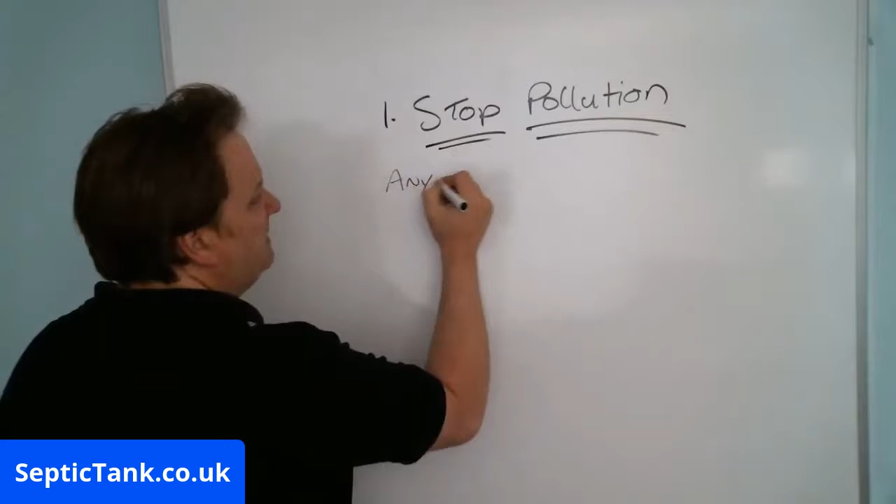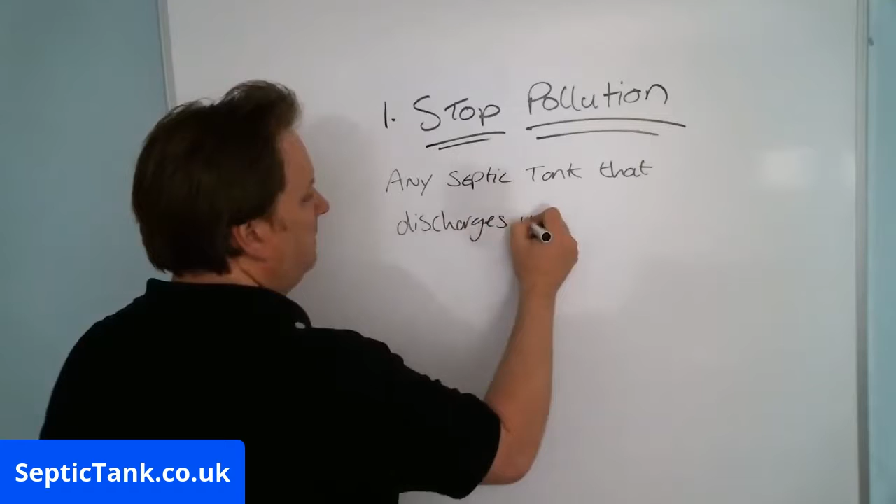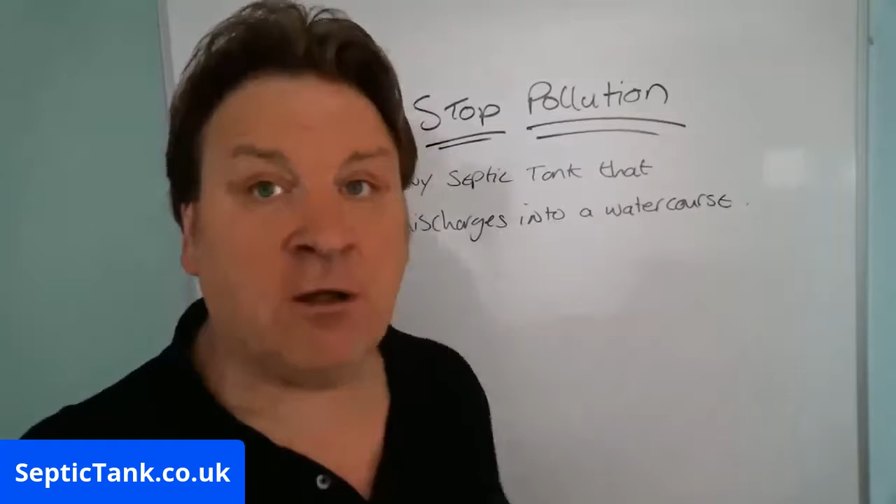Any septic tank that discharges into a watercourse. So after the 1st of January, any septic tank that discharges into a watercourse, by watercourse I mean a river, a stream, a ditch, a culvert, anything like that, a brook, will become illegal, right?

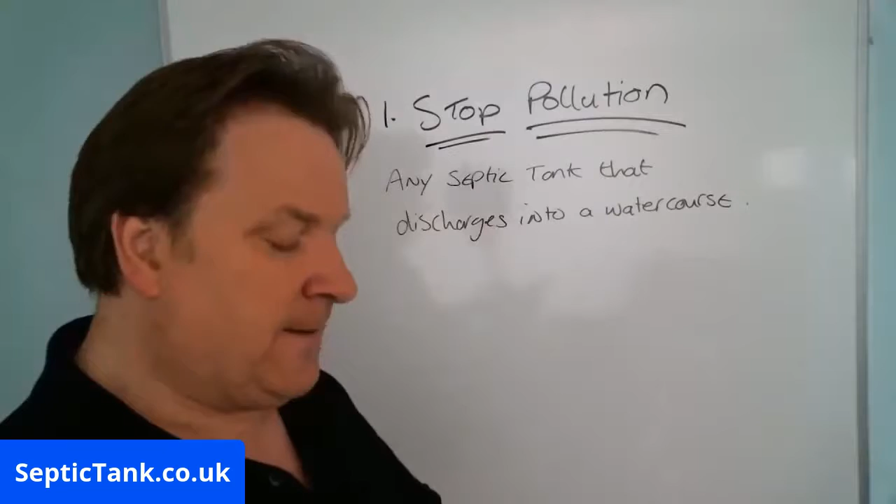Because raw sewage goes into a septic tank. Raw sewage comes out of a septic tank, in this instance, directly into a watercourse. So any septic tank that is discharging into a watercourse after the 1st of January 2020 will become illegal. That's a fact, right? You only have to go on to the .gov website and type in General Binding Rules and you see it.

Now, I'm not saying you're gonna like what I'm telling you here, but nevertheless, it's coming. As I said, the whole reason I'm telling you that is because I've got some really good news that can help you easily, simply and cheaply fix your septic tank and make it legal. That's the whole point of this live broadcast. I'm not trying to sell you anything. I don't want your money. So if you've just joined me, let me put your mind at rest. I'm just giving you the facts, right? So these are the facts.

Okay. So 1st of January, if your septic tank discharges directly into a watercourse, it will become illegal. Full stop. No ifs, no buts. That's number one. Okay. That's the most important. That's one of the biggest.

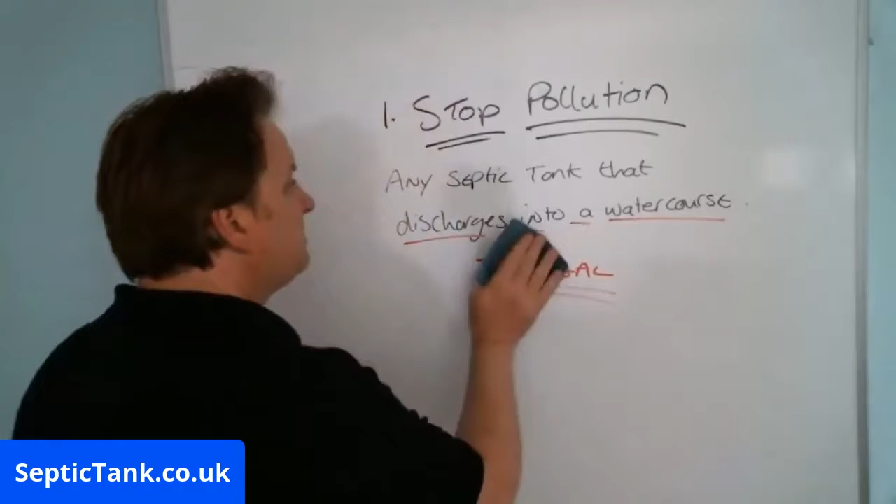Oh, and why they're calling it the septic tank ban is because when the government agencies go around to your house or my house, and if they find that our septic tank is discharging into a watercourse, then they'll ban you from using your septic tank. That's why it's called the septic tank ban. Okay. All right. So that's number one. They want to stop pollution.

All right. Number two, obviously, they want to stop pollution, but the second reason is also to stop pollution. But under this one, there's like different requirements, okay, which will make your septic tank or my septic tank illegal. Okay, so again, just go on to .gov, general binding rules, and you can see this for yourself, right?

So if any septic tank is leaking, that means if it's got any cracks in it, if the mortar and the cement have crumbled and sewage effluent is seeping out, is leaking out, that's what they mean by that. If it's leaking, if the soakaway is blocked, or if it's not draining away,

or if there's water bubbling up, or pools or puddles of water above the septic tank or the soakaway. So what that means is, it can be puddles. So if there's puddles of water, wet grass, because at the end of the day, the water is sewage, raw sewage. It's sewage effluent.

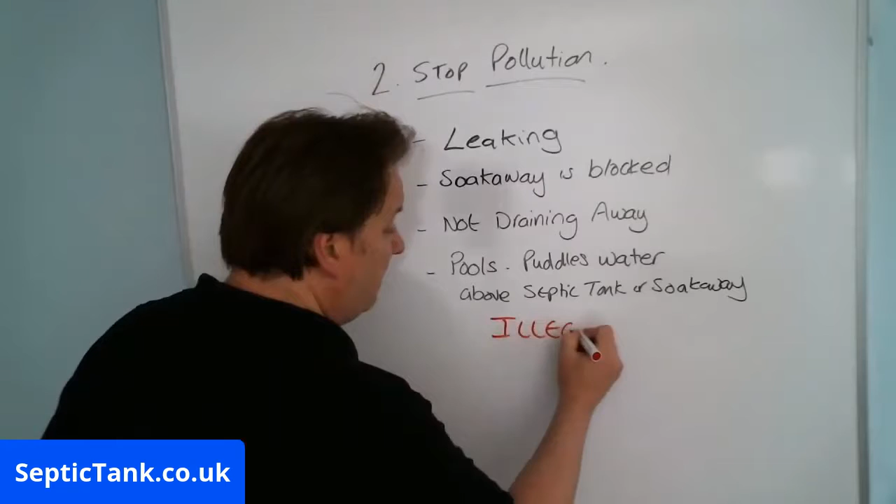You call it wastewater, but if it's leaking, if your soakaway is blocked, if it's not draining away properly, if there's pools or puddles of water above where the septic tank or the soakaway is, especially on the grass or the drive, then after the 1st of January, your septic tank will become illegal.

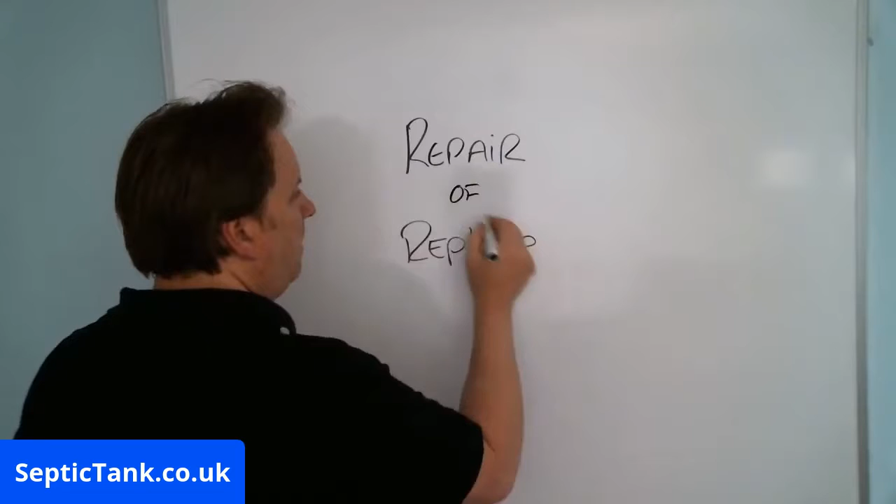And so the only way to get around this, the government state on the website clearly that if your septic tank or my septic tank develops any of those symptoms, then we have to do either one of these things. We either have to repair or replace our septic tank and soakaway.

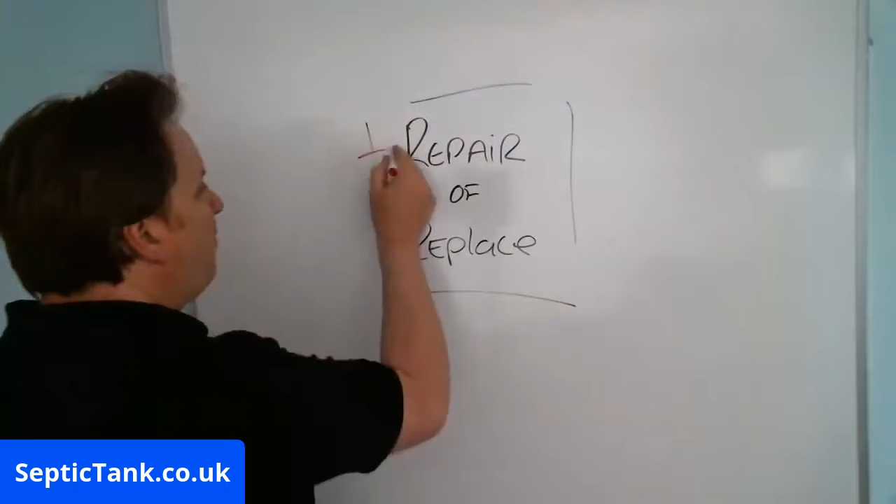So let me show you, because I said I was going to show you how to save money here, didn't I? Okay, so those are your two options. You can either repair or replace your septic tank and soakaway. Now, this is stressing people out because it's just another thing. It's another bill to pay.

People already get fined for dropping litter now. They already get fined for speeding. They don't want to get fined because their septic tank's leaking, or because their septic tank is discharging into some ditch. And as I said before, people are getting really angry about this, shouting and swearing, threatening to beat me up and stuff. Well, not just me, but anyone that's bringing this news to them. But it's a reality and it's coming.

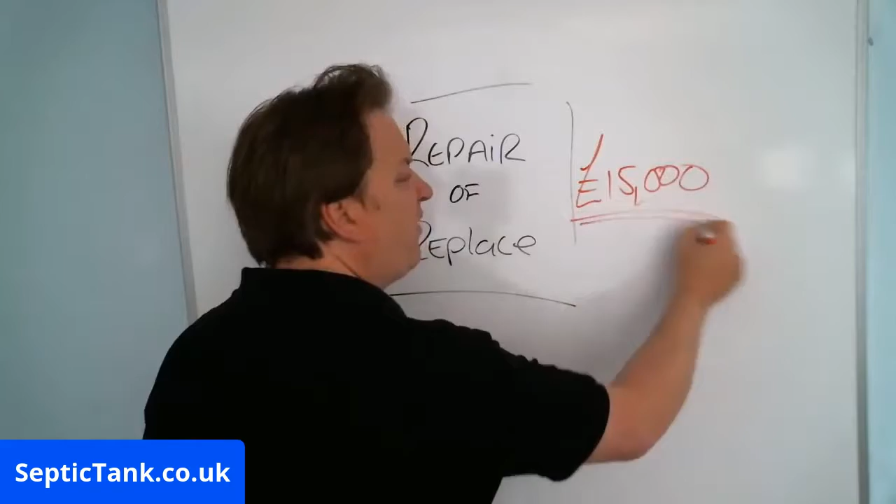But as I said, I'm going to show you two simple ways where you can save thousands and thousands of pounds. That's the whole point I'm doing this. Now, many companies are taking advantage of people at the moment because they have to repair or replace a septic tank. A guy rang me up last week, worried about the new rules and regulations coming into force. And guess how much he was quoted to repair his septic tank and soakaway? £15,000. Now that's an obscene amount of money, and that's being quite generous there.

People have been quoted 15, 20, 25, 30,000 quid because they're saying to them, no, the septic tank ban means all septic tanks will be banned and become illegal. Let me just stop there. Not every septic tank up and down the country will become illegal, only certain ones.

But please, please, please, before you spend another penny, before you fork out 15, 20, 30, 40 grand replacing your system, if your septic tank is discharging into a river, a stream, a brook, a culvert, or whatever, I'm going to show you a really cost-effective, legal and simple fix. Have a look at this, right?

All right, so to do this, I need to draw you a quick picture, but what I'm about to show you, you'll thank me for, and hopefully you might even buy me a pint or two. Right. Okay. So let me show you this.

Okay. So let's say, all right, this is your house. So just bear with me a second as I draw my lovely Play School house. Probably shows my age. Do you remember Play School and Humpty Dumpty, stuff like that? Anyway, I'm sure the house always used to look like that in it. Okay. All right. So here we go.

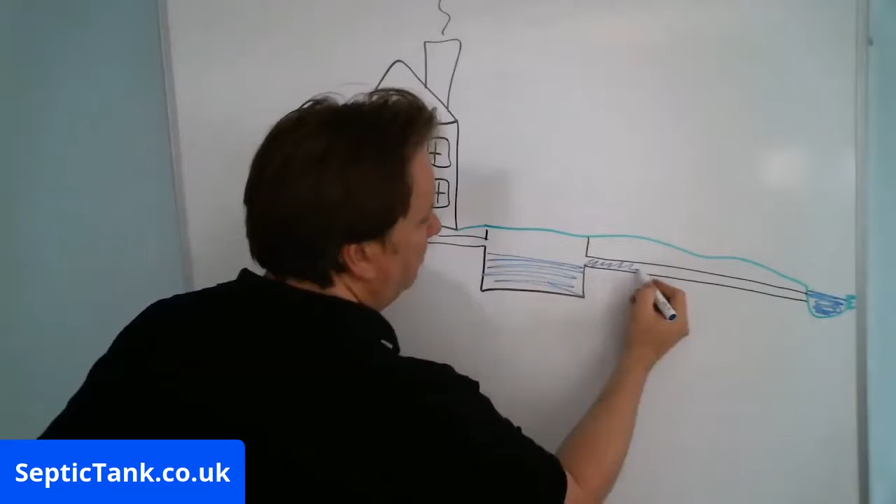So basically the septic tank here fills up with wastewater from your property. It reaches the outlet pipe, and then all the sewage effluent makes its way and goes into the ditch or the watercourse. Now, as I said to you, on the 1st of Jan 2020, this will become illegal, and people will be fined. So this is basically what the septic tank ban is trying to target. This form of pollution.

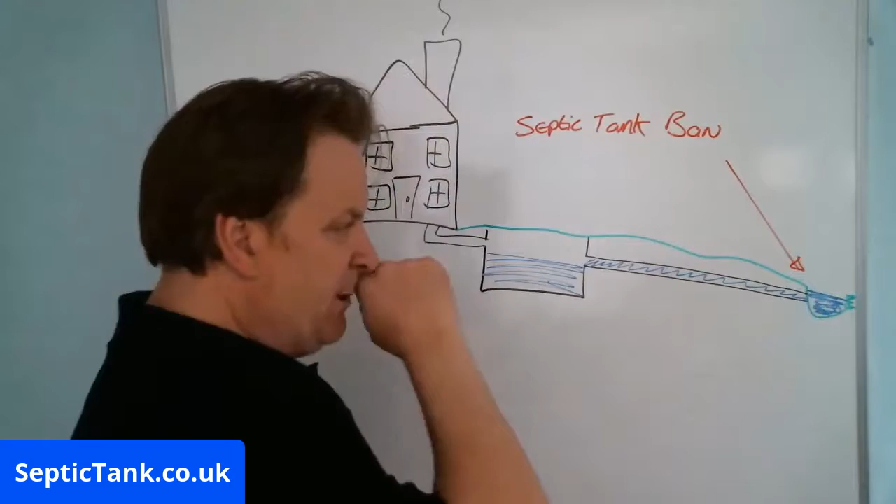And based on this, many companies will come around and they'll say, oh man, what you're doing is wrong, man. Give us 20,000 quid and we'll fix the problem. No, before you do that, please seriously consider getting yourself a septic tank converter. Let me show you what I mean. They're amazing. And they're all fully legal, government backed, government approved and approved by UK building regs.

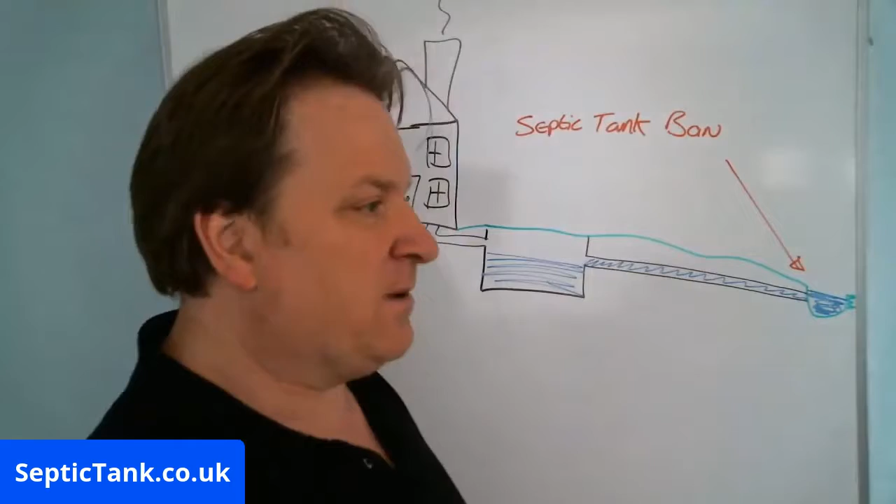Instead of having to replace your septic tank, right, most septic tanks that are made of bricks, that are made of concrete, they last forever unless there's been an earthquake or tsunami, or a motorway's gone over it. Most septic tanks will outlive me, our grandkids, their kids. So get someone to check the integrity and the structure of your septic tank. Just because your septic tank's polluting a ditch doesn't mean it's bad or tired or worn or needs replacing. That's number one.

Secondly, instead of having to relocate your septic tank and your soakaway, some companies will say, no, you must now put in a sewage treatment plant. You must get one of these biodigesters and put it in. Yes, we know they're 15 or 25,000 quid, but it's the only way to make your tank legal. It's not true. This is how you can also make your septic tank fully legal. Get a septic tank converter.

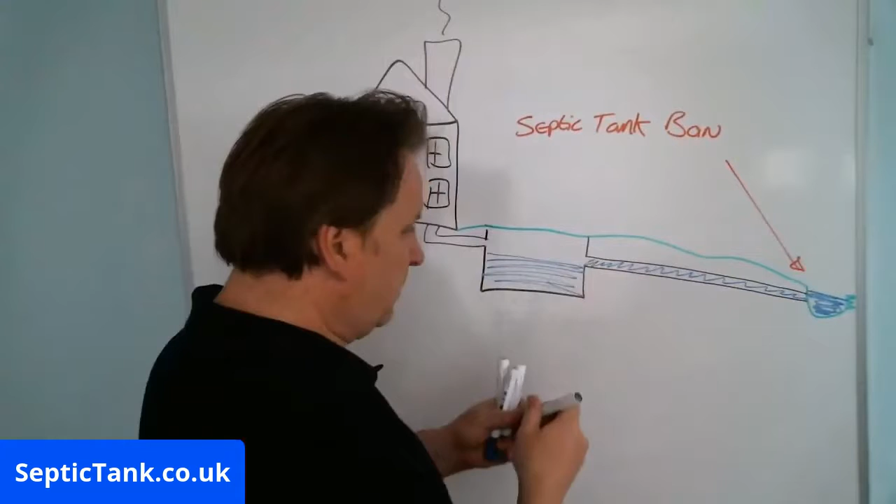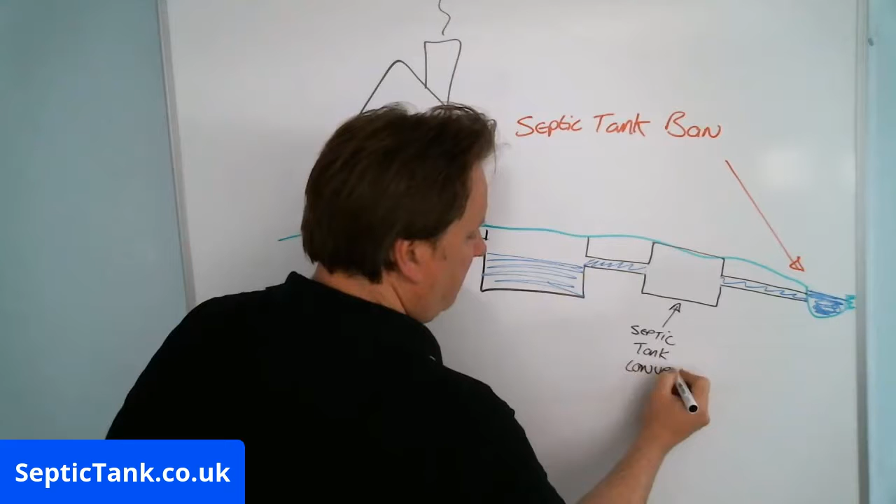All that you do is, in between the watercourse and the septic tank, you dig a hole. You just dig a hole. That's right, just dig a hole. And you put a septic tank converter in. Septic tank converter. All right, can you see that on the picture there? Yeah, you can see that.

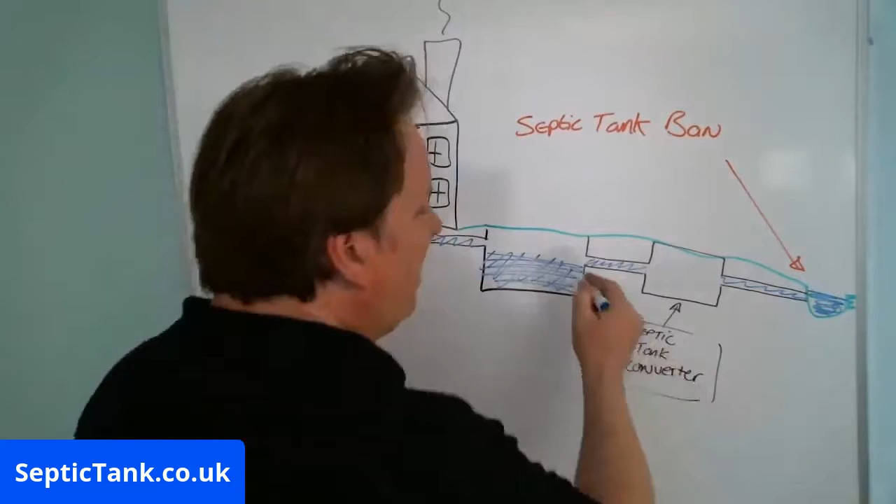So you put a septic tank converter in there, and what happens is all the raw sewage, all the sewage effluent, leaves the house. Yes, it'll still go into your septic tank. All the raw sewage will then leave the septic tank and go into the converter. It's called a septic tank converter because it turns your sewage effluent into clean wastewater. And it comes with a government certificate, right?

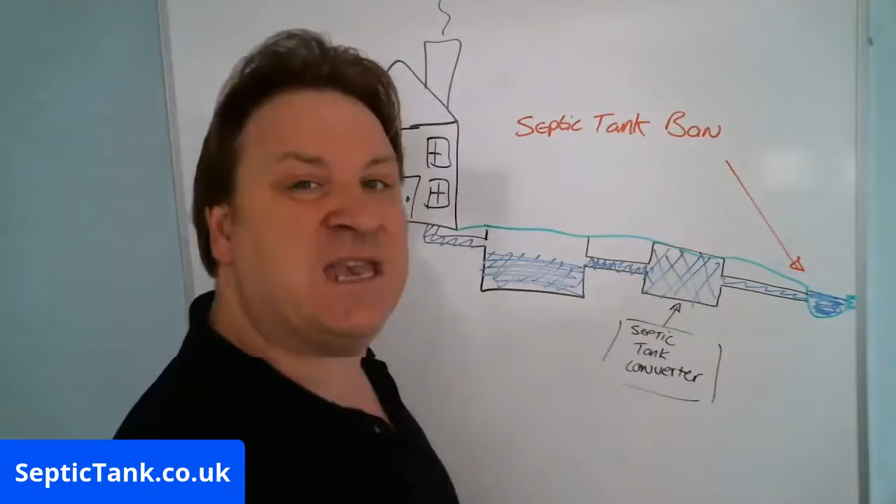So it goes through this converter. It's transformed into clean water and it can still go into the ditch that way, right? Do you want to know how much these septic tank converters are? Are they 15 grand? Are they 20? Are they 25 grand?

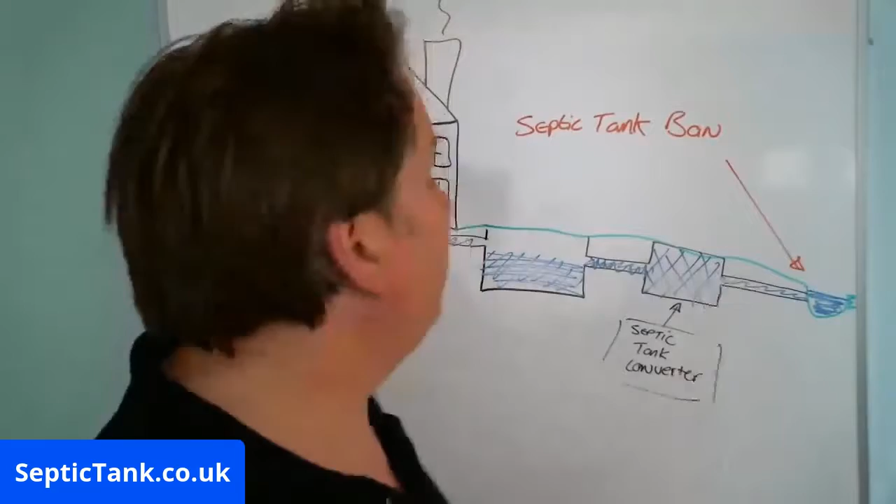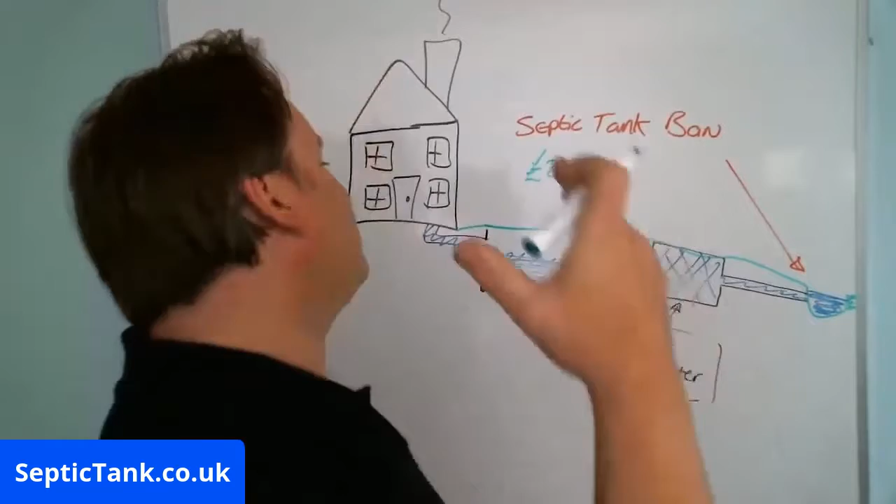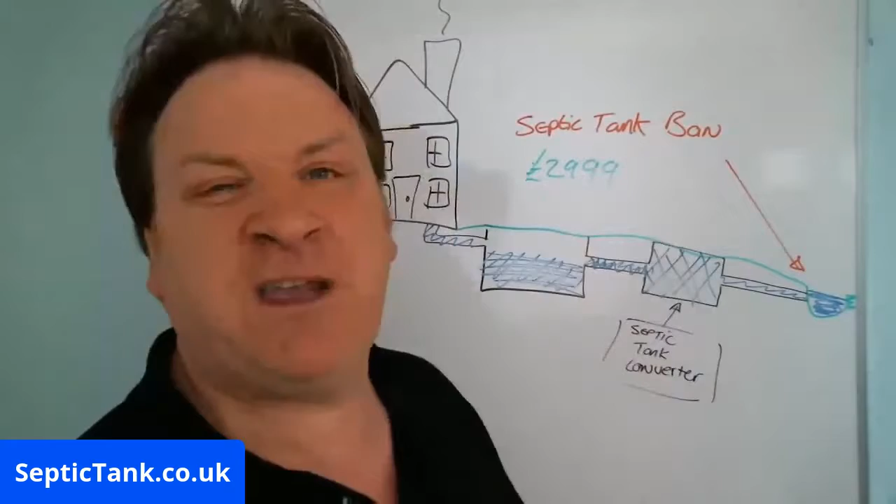No, they're nowhere near the price of electric sewage treatment plants or having to replace your septic tank and soakaway. Let me show you the price of a septic tank converter. They're 2,999. Full stop. That's it. So for just under 3 grand you can fix your septic tank problem. So 15 take away 3 is what you will save. This septic tank converter here will save you a minimum of 13,000 quid.

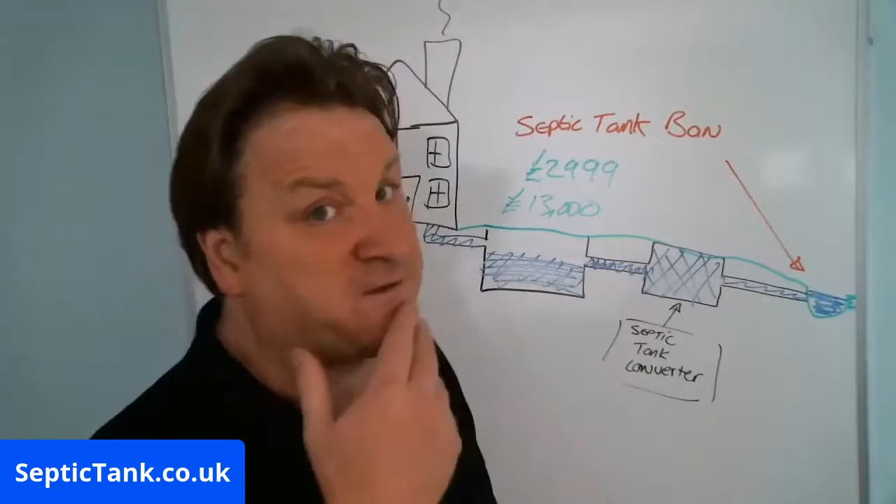People are starting to ring me up, and I know the going rate, I've been doing this 20 years. I know what people are charging. People are coming in saying, oh, mate, it's going to cost us 15, 20 grand to put a new system here to get it right. Maybe that is what they're going to charge you to do it. But these septic tank converters don't need any electricity. There's no moving parts, no cogs, no bearings, no pulleys, no motors, no shafts in them.

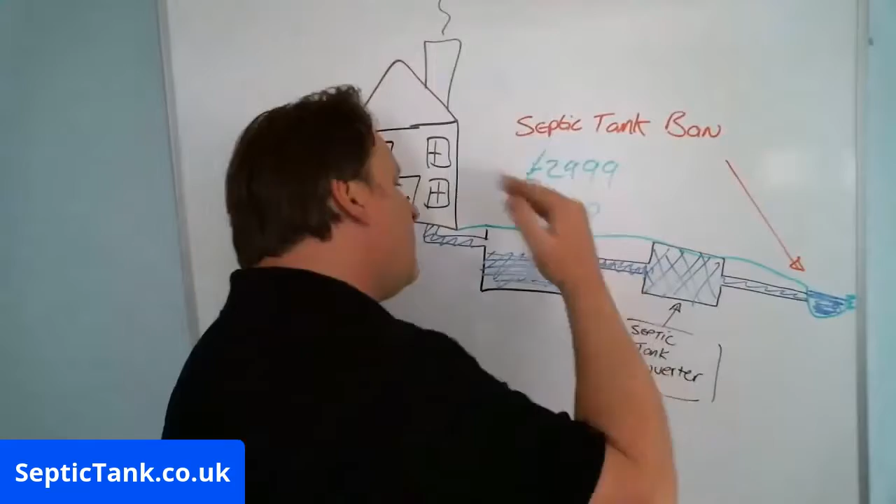If you think about it, an electric sewage treatment plant has got water, moisture, sewage, and they've got motors and cogs and pulleys in there. They only have a year's warranty anyway. These septic tank converters are non-electrical. They don't break down, they don't need servicing, they're government approved, and they'll save you 13 grand minimum. The guy last week bought one of these off me, saved himself 12,000 quid, just like that. So when I said I had some good news to tell you, I wasn't kidding, was I?

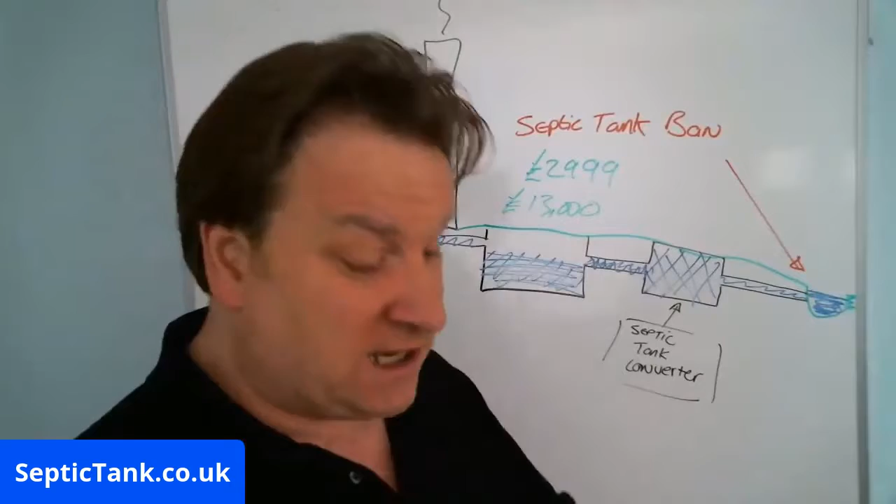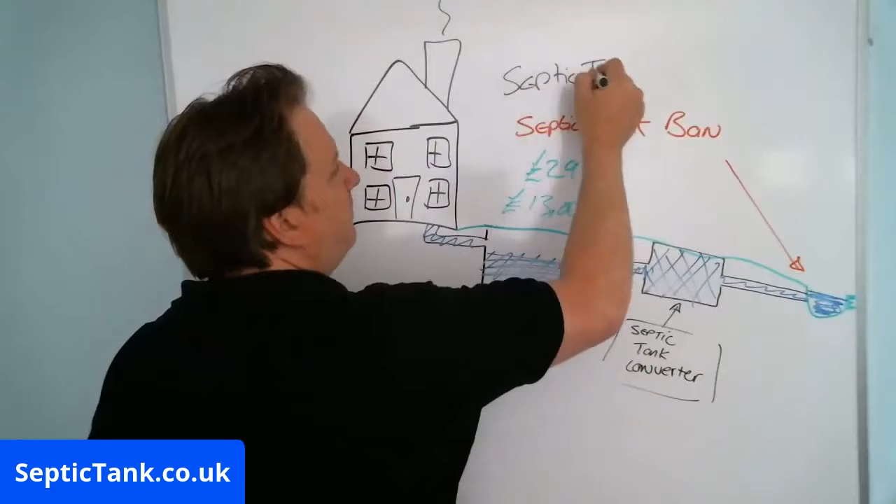But I'm going to show you something else now that will save you even more money. Let me show you this. This will blow your mind, what I'm about to show you now. And this is free. This is not going to cost you a penny. Oh man, it's costing me to tell you this, but I'm very happy to do so because what I'm about to show you costs zero, and it will make your septic tank fully compliant and save you thousands and thousands of pounds. Have a look at this.

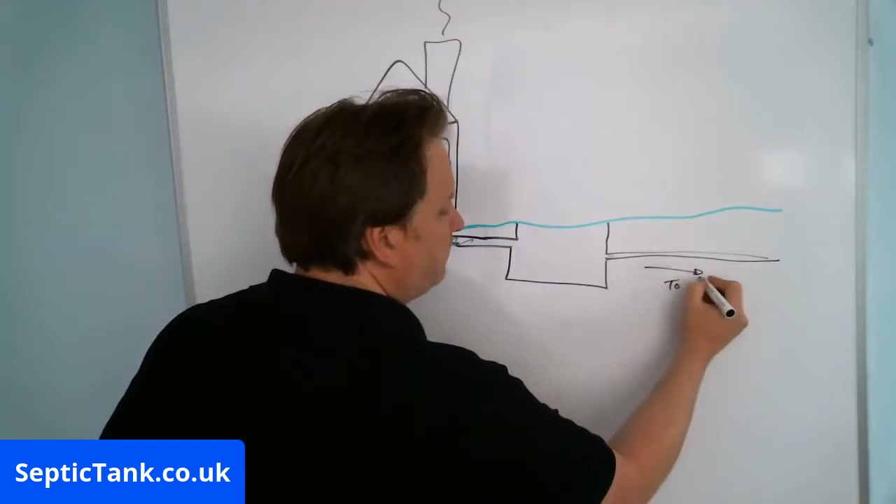Right, so let me do your little house again. Obviously this only applies to you if you're a septic tank owner. So let me redo the septic tank. This is the waste pipe from the house. Let's just do a new septic tank here. There's your new septic tank. This pipe here just goes to the soakaway, and this is your septic tank here. So how am I going to save you 13, 25, 35,000 quid?

Because if you're a septic tank owner, solicitors and people buying houses that have got septic tanks are getting people to drop their prices by 15, 20, 25, 30,000 quid. I kid you not. My phones are ringing all the time from people whose heads are done in. They're angry and stressed because the people buying their house want to knock them down 15, 20, 30, 40, 50 grand. But I'm going to show you how you can save thousands and thousands of pounds. So let me explain what happens. Someone comes to buy your house, or my house.

Now let's pretend, because you've got to get into this. You've got to understand this, though. You've got to understand it, right? Because it does people's heads in when they first initially come across this problem. But you've got to understand that the people buying your house or my house, right, may have never heard of a septic tank before. They may have never had a septic tank.

It's all right for you or for me. We've had a septic tank, so we know what they're like. We know how often we've had it emptied. So we're familiar with it. But you've got to pretend that the people buying your property haven't got a clue about what a septic tank is, right? Or maybe they've had a septic tank and they've had problems.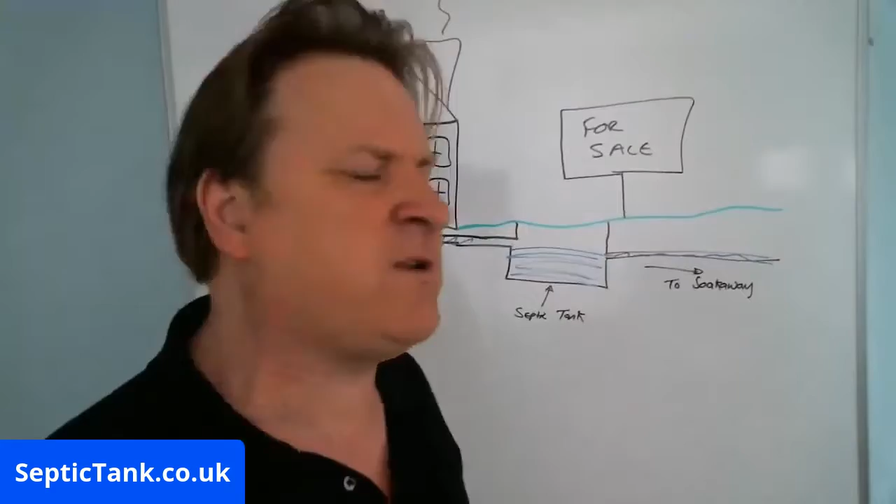So this is the thing. They come to buy your house, right? Then they find out, it shows up from the solicitor that you've got a septic tank. And they're like, a septic what? We've been on mains drainage. All right, what is this septic tank? Well, okay, and this is how it goes, right?

All our waste, from the toilet, the bidet, the shower, the bath, the dishwasher, the washing machine, the sink, the toilets, all goes into a septic tank and it drains into the ground. And they're like, okay, that's fine. So, how old's the septic tank that they've got in? And so this is where the journey starts.

The solicitor will come back to you, right? And he'll say, okay, Mr. Bloggs, okay, Jason, tell us a bit about the septic tank that you've got in your garden. Oh, and everyone's like, oh, crap. Okay. And they rummage around and they get their septic tank emptying receipts out and they hand those to the solicitor, and the solicitor's like, okay, thanks very much. Okay, so then he'll hand them to the people buying your house.

And they'll say, well, this doesn't tell us anything. It doesn't tell us what system they've got in. It doesn't tell us the age of it. It doesn't tell us the condition of it. It doesn't tell us the capacity of it. It doesn't tell us how often they were maintained. And so this starts to drag on.

So you just want to sell your house, right? But suddenly you're tied up for 2 months with all these flaming questions and stuff, and no one's getting to the bottom or getting any satisfying answers. And this is what's happening, right? And so the people say, stuff it, right? They get 2 or 3 people in, and they say, give us a quote to put a new septic tank or sewage system in. And that's what's happening.

The people come and say, that septic tank in that house that you're looking to buy, number one, it's going to be illegal after the 1st of Jan 2020. And secondly, it's tired, it's worn. Listen, I'll tell you what, and they're giving quotes to people, right? They're giving 18,000, 25,000, 35,000 quid quotes, right?

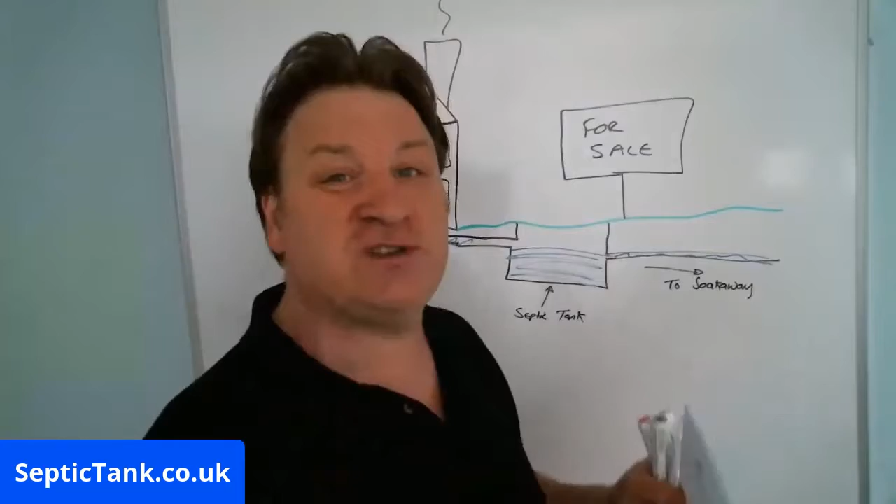Now, come on, you tell me, right? You tell me that that isn't good news, all right? So there you go. So that's basically it. See, yes, the septic tank ban is coming into force on the 1st of Jan 2020. It is. But there's a lot of misinformation out there, right?

If your septic tank is discharging into a watercourse, don't spend 15, 20, 25, 35, 45,000 quid on replacing your system. Have a look at the septic tank converters, septictank.co.uk there, all right? They're legal and they'll save you thousands of pounds.

Just do some research on it before you take the word of the people who have come round to replace your system, because they have to make a living, right? People have to make a living. And there's a lot of misinformation and there's a lot of scare tactics out there.

If you're a septic tank owner and you're selling your house, get yourself a government compliance form. Just go to septictank.co.uk. On the top left hand side of the screen there, you'll see how to beat the septic tank ban. Just go down and download as many copies as you want. They're free. I don't want a penny off you, and there's no catch, right?